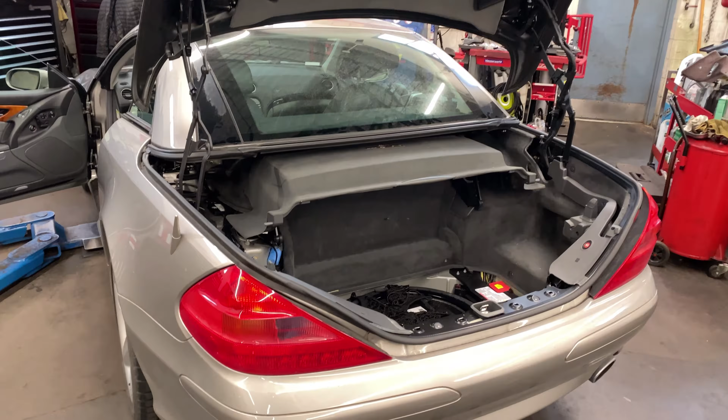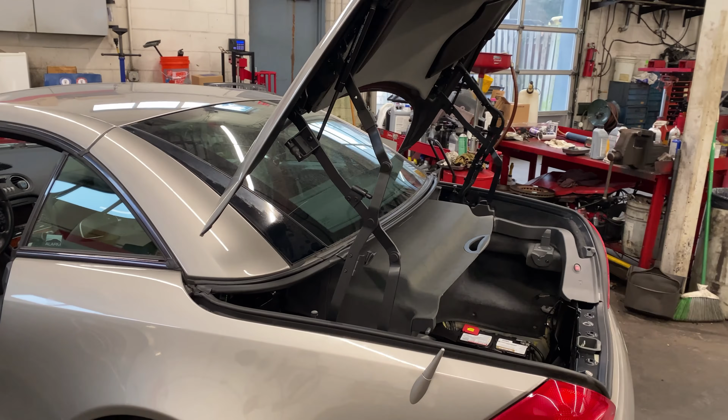Hey guys, welcome back. This might be part two on this Mercedes SL500 2005 with a convertible rooftop problem. As you can see, I had the convertible close, which I did manually at first because it was impossible for me to do it electrically or by commanding with a switch.

Things you need to do before you can even open the trunk on this vehicle: either have the convertible top fully closed or fully open. Otherwise, you will not be able to open the trunk.

I was completely right about hydraulic issues with this. Since I couldn't even open the trunk, we called the dealer to find out if they had the hydraulic pump, and they do have it. Even though now I know I don't need it, and I'm going to explain why not.

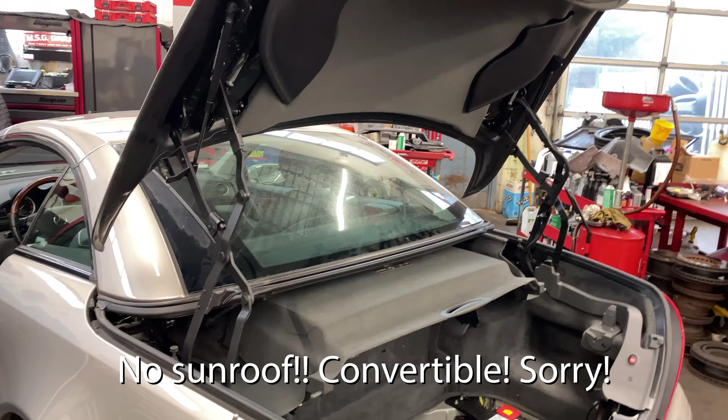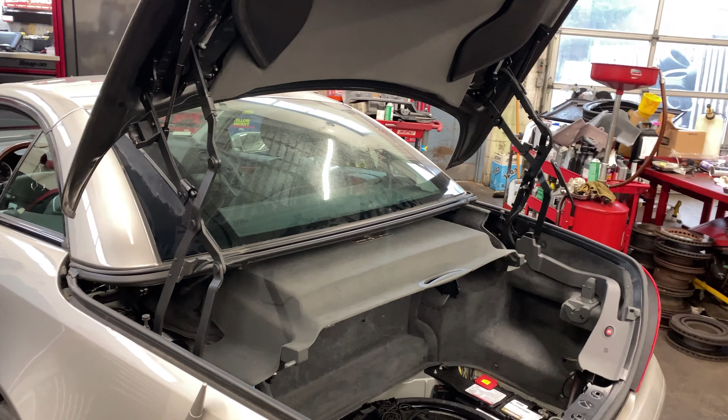But let me first show you the process of manually opening the convertible after you have it completely down, because otherwise the trunk lid will not open. You will know that because these flaps will not be even with the convertible.

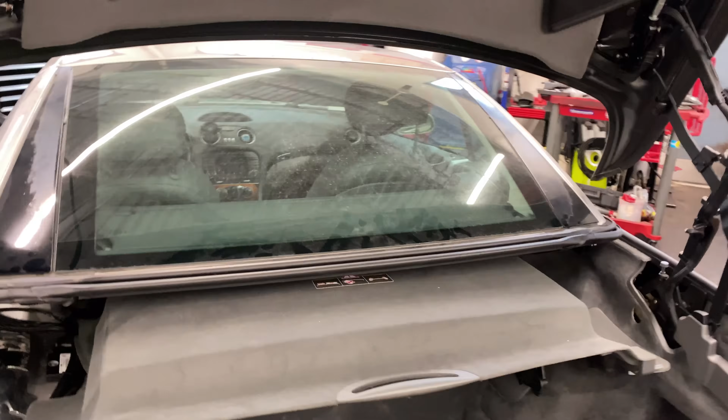So you need to make sure you can close that, even pushing it down, helping it, disconnecting, taking the ignition off and letting it sit for a little while, then pushing down until it locks. You will notice the windows raise up and stay there, telling you the rooftop is completely closed, and then you'll get a warning message on the cluster.

After that, make sure you have the key out of the ignition and at least 2 meters away from the car. Make sure you have the manual key with you, not the actual key fob, just the key, because you're going to need to unlock that.

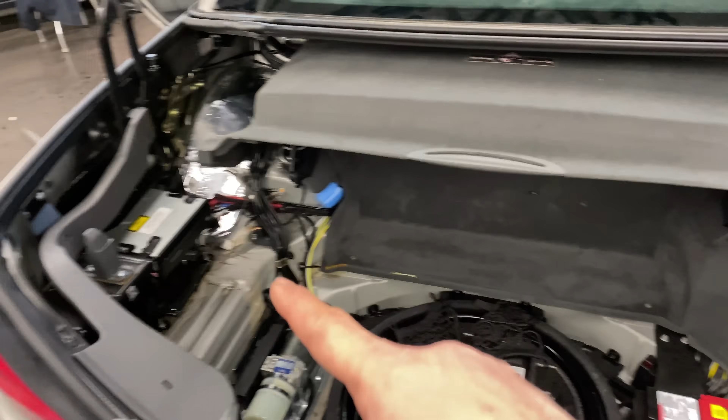With the covers on, now I have this side off. You have two plugs that you need to remove, one on this side and one on the other, to access this 6 millimeter Allen wrench bolt. You need to spin it. Let me show you - right now I got it locked, but it doesn't matter. All you need to do is put that in and go the other way.

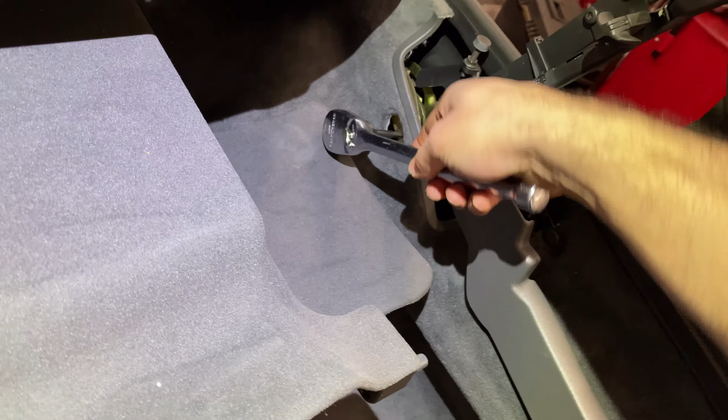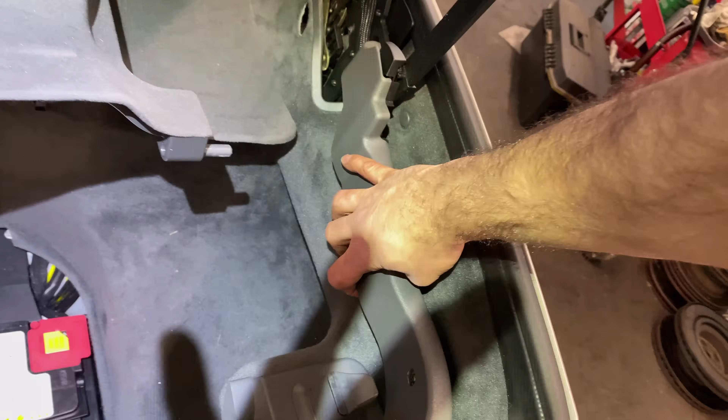See, it releases here, and then this one will too - sorry, I'm focusing on my vision and not the camera. Then this one goes the other way, and that will release the trunk. You need somebody to help you pull from here, both sides at the same time, to raise the trunk completely open.

Let's say you got, as it is right now, the convertible fully closed - that's the best scenario. But of course people aren't going to complain about a convertible roof closed. They'll complain when the convertible top is fully open and now they cannot shut it down, and it's raining or getting too cold, right?

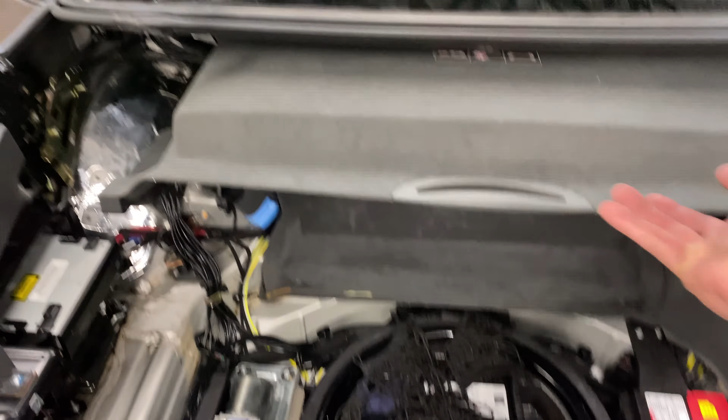So that's the problem. When you have that issue, before you do what I just said, you need to open the trunk, try to raise the whole convertible roof, and put a wedge or something in here so you can get to the motor - that's the hydraulic pump motor for the roof.

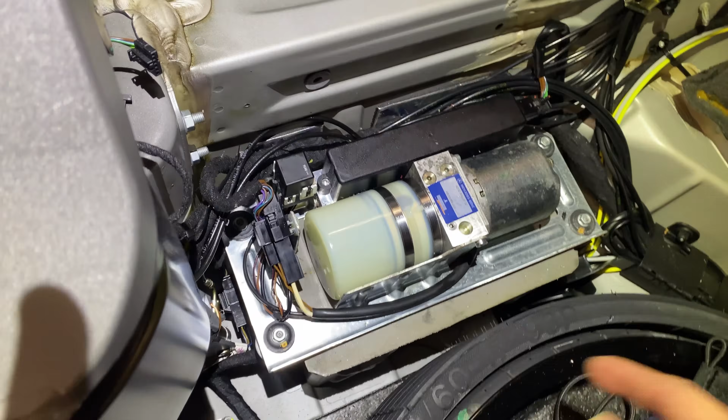Use the same 6 millimeter wrench here, go counterclockwise, then two turns - don't use too much force, just open it. That will release the pressure, and you'll see that now when you lower this convertible top, it will just sit down by itself because that releases the pressure of the entire system.

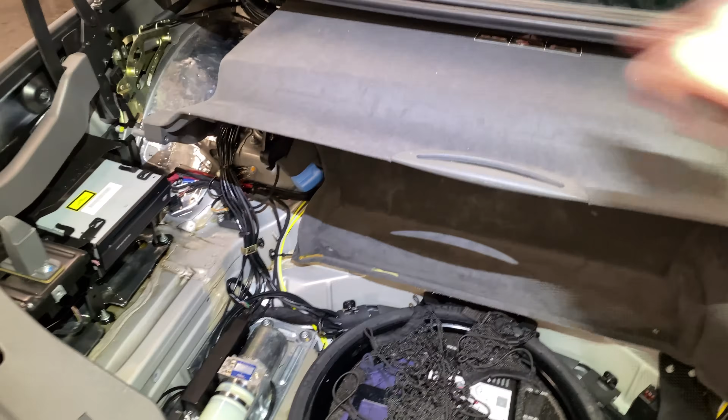Then you can go on the sides, do the things I said with the 6 millimeters, and then have somebody else pull the trunk lid open, fully open.

After you do that, and the convertible is fully open, you need somebody else helping you. Then you're going to grab the convertible top and try to guide the front to the lock mechanism - it's going to be like a pin that has to go in, and then a lock that has to fit in there.

Before you can close it or put them in place, there's also another thing you need to do here. That plug right there has to be opened up, same 6 millimeter wrench, and you go - I think it's clockwise, you'll see it when you do it - so the mechanism in here will disengage and let you bring it in.

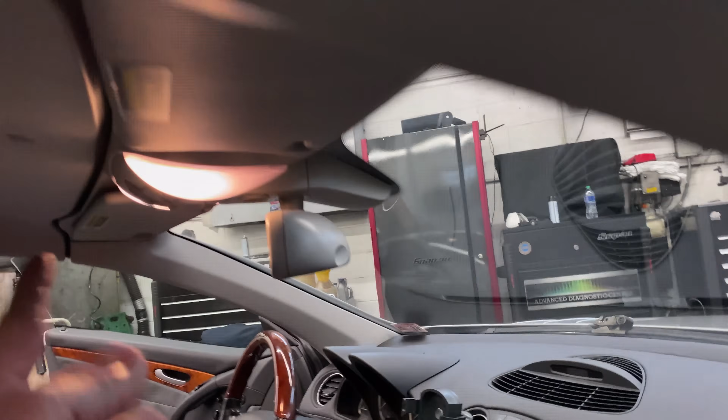When you do that, you can lock it doing the same thing on the other side. Make sure you push down here just to make sure there's no movement. Again, with two people doing that, then the roof is closed.

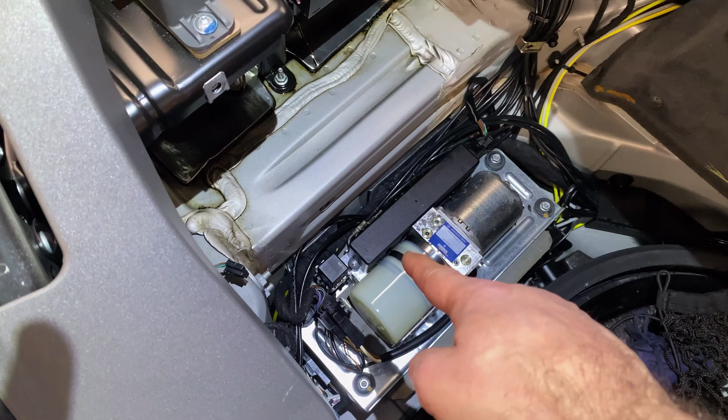You can then come in clockwise and close that valve. Again, just put a little strength into closing it, because otherwise the pump will not build up pressure. Then you need to come over to the trunk, and that's why you need to have the key on - I mean the actual key.

You need to secure it before you do that. You need to secure here, and again it's going to be the opposite way - you'll see the piston going in, so it has to stay in. You see how it's holding it down? Let me put some light so you can see it on this side.

So the piston has to stay all the way in for the trunk to be able to close. But since the convertible top was open, these flaps in here are going to be sticking out. And obviously this lid will be up here, right? You will have the lid up here and you will see that the flaps are all the way out.

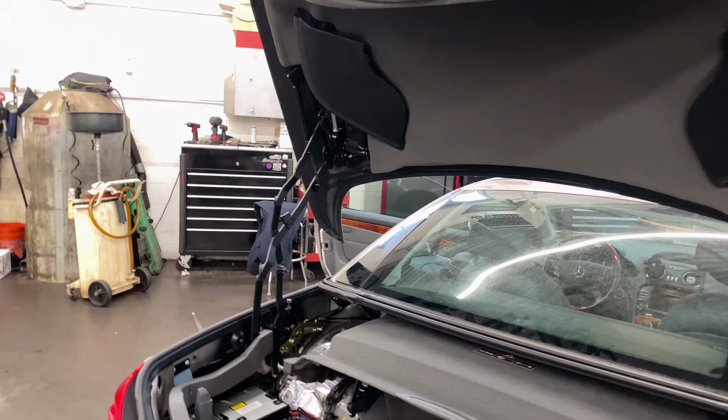So you need to connect the scanner. It has to be a factory-level scanner so you can go over to body, RBC or body or roof, and use the emergency activations to retract the side flaps. I used Xentry and I was able to do it with no problems. I didn't check Autel, so I would lie if I said whether it can do it or not. And for this particular roof, Autel, even the Ultra with the latest software, was completely useless. So that's my point.

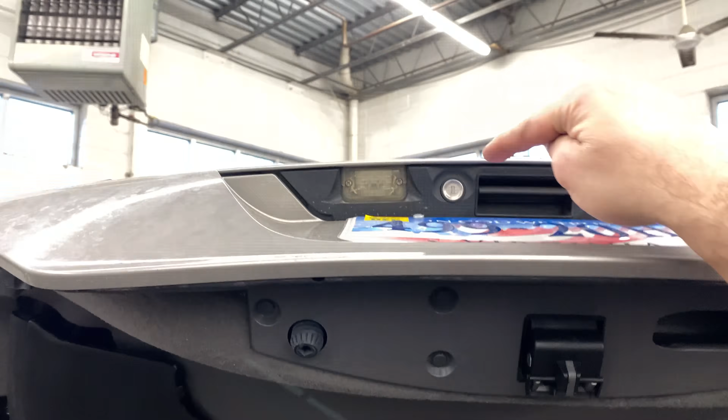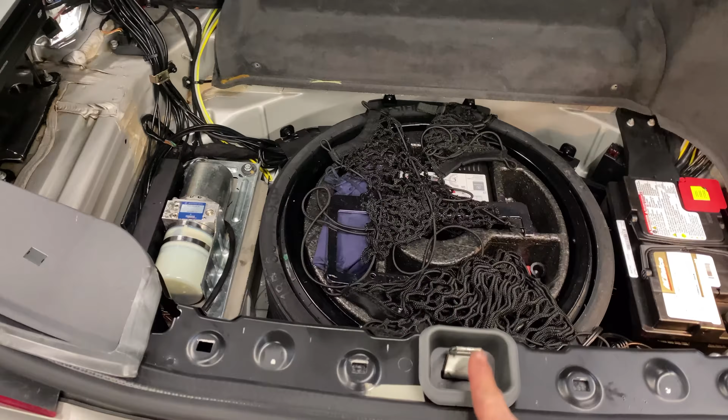When you close those flaps, then you're going to use the key to bring... Let me see if I'm saying this correctly. No, before, sorry, I'm talking too fast and not making sense. So it is the right procedure, but before you can close the flap, it will tell you the trunk is not closed, so you need to make sure you bring just the trunk lid. The whole bracket itself is going to stay there, but the trunk lid is going to come and shut. It has to be completely closed and sensing that it's closed for those flaps to be retracted.

After you retract the flaps, you can get off the scanner. That's all you need the scanner for. You can now use the key, close the trunk and put them into this position, which is the normal position. Make sure that this is closed before you close the trunk, and then just close the trunk.

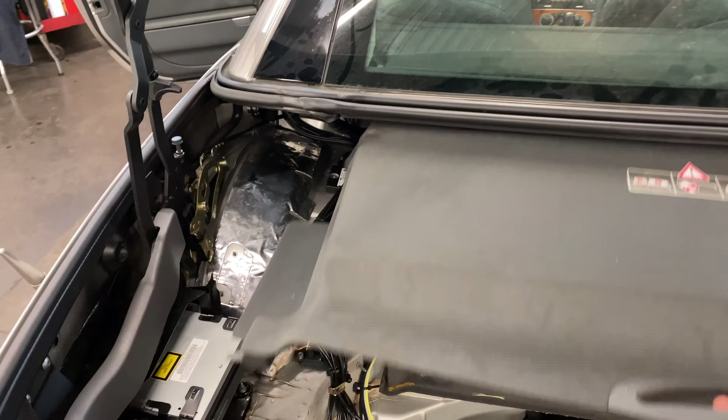And one thing that is going to tell you if you are right is those sides, right here and right here. If they're shutting down normally like in here, then the rooftop is fully seated in the front, and those levers on the side, the lock levers, they call them tubular left side and right side levers, will be completely inside. If you can still move them and they're not staying all the way in, you need to release the pressure and make sure that this rooftop is completely pushed in. That's just the way it is.

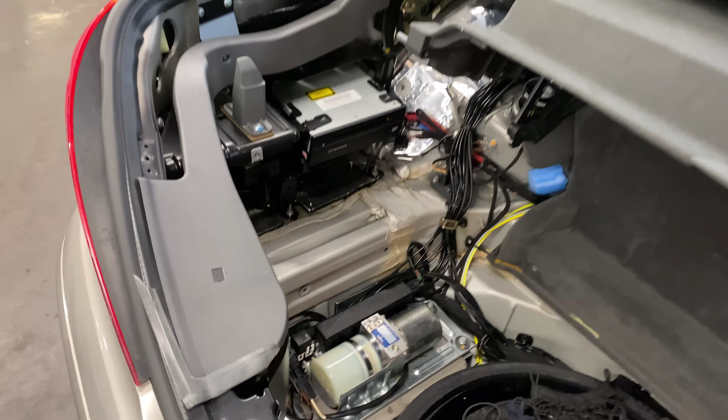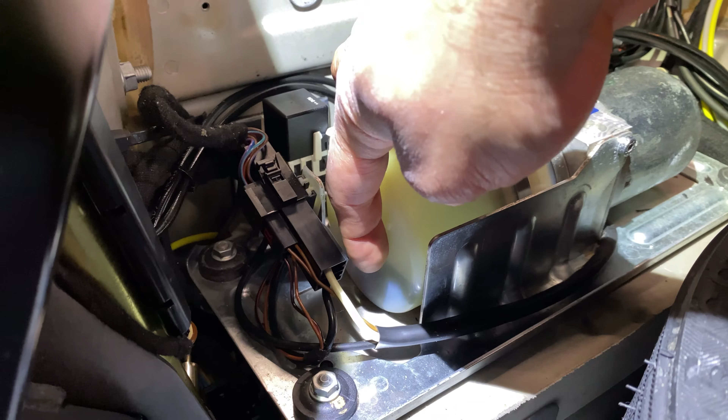That's how I went through all this process, and then I was able to see that the pump right now has oil, but this was almost empty. Right here, there are two triangles. You can see it in there. There is one here, that's the upper level, and the other one is the minimum. It has to be in the middle of that. So I'm like, okay, we're missing oil. Something is happening. And yes, I was low on oil.

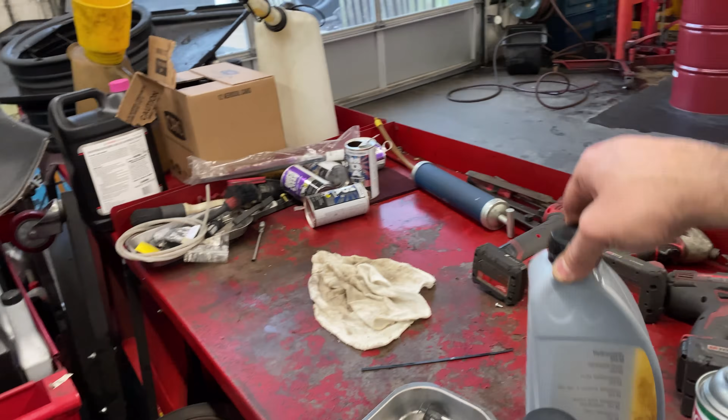Make sure that you use original Mercedes-Benz oil, only Mercedes-Benz, and this is what the dealer sent with the specific VIN number from this car. You use the side plug right here on top. Let me see what size that is, so you guys get the whole picture. I still have it here, and that's a 4 millimeter.

So that's a 4 millimeter on that plug. I put an absorbent rag on the sides, and just by squeezing the container with my fingers, I was able to squirt and fill it up with, as you can see, not a mess, not a drop outside. Everything is 100% clean in here. So if you can do that, do it that way. Otherwise, find yourself a small bottle and fill it up slowly. That's the only thing I can say.

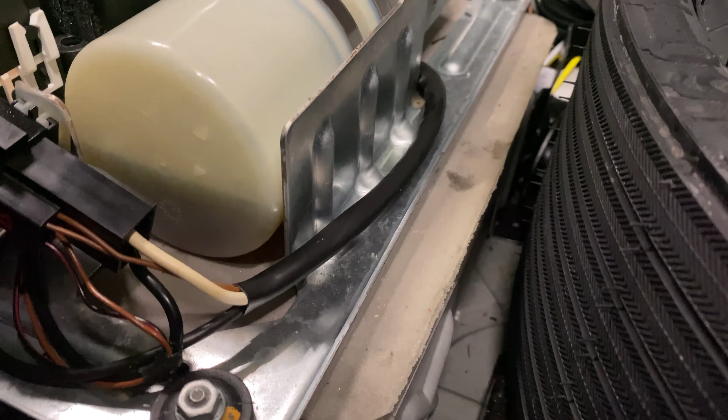So after that, the pump operates, and I was able to move the roof back and forth with no issues and fast. But then I saw that it was slowly slowing down. I'm like, okay, this is not right. I came back here, and now, as you can see, it's a little lower than the level. So I'm like, maybe it's air. So I filled it up again about 4 times, and it's doing the same thing.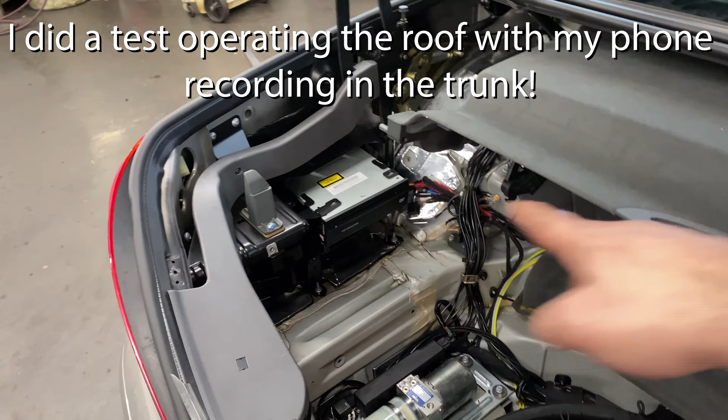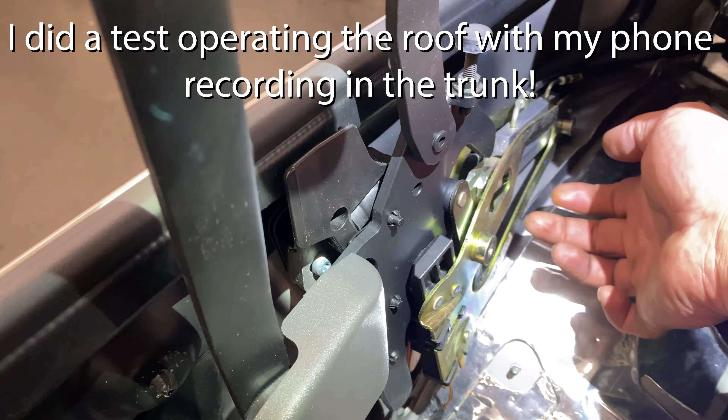So I opened this cover on this side, and I noticed oil sitting in here. I cleaned as much as I could, but you still can see oil here, and the oil is coming from the side lock tubular tubes. Not sure if you're going to be able to see that, but I'm trying to.

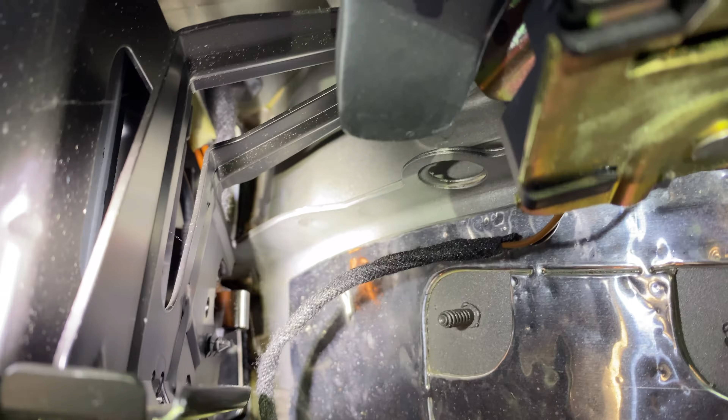Show you that it's all full of oil. Let me get the light to exactly what I needed. Hopefully you can see the liquid reflection right at the bottom. Camera is not really focusing on what I need, but believe me, it's right at the bottom.

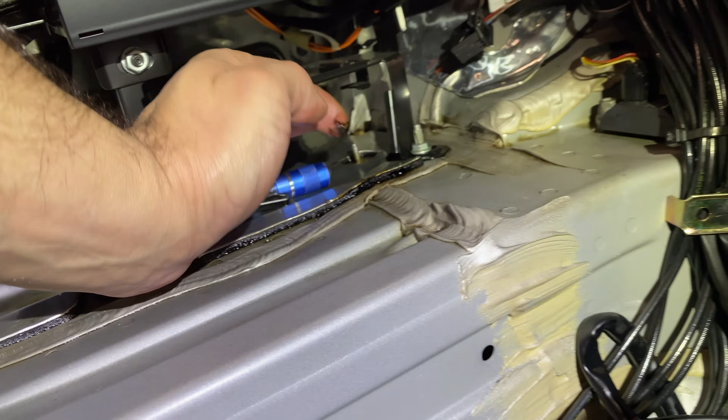So what it's doing, since there is a lip in here on this, the oil drips on that side, goes down, and then it stays in there till it fills. I gotta be able to show that here. I mean, look at all the oil right there. See, it's still dripping. Look. And that's the same on both sides.

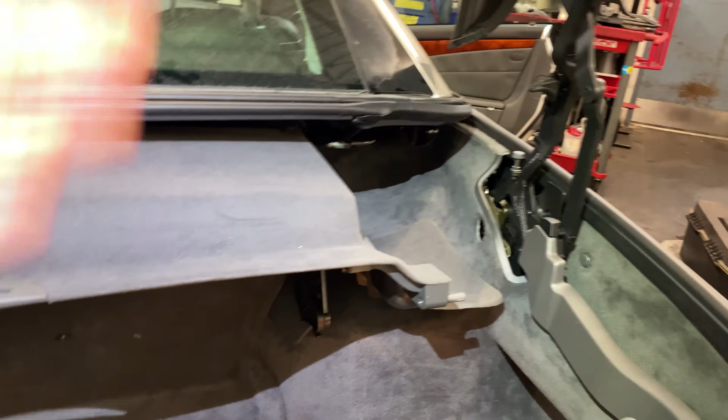So I'm going to open the rooftop, or not the rooftop, the trunk lid, and take the plastic covers and get everything ready. Parts are coming tomorrow. They're in stock, but not in Virginia. So we go from there. Hopefully this can help somebody, or even myself in the future.

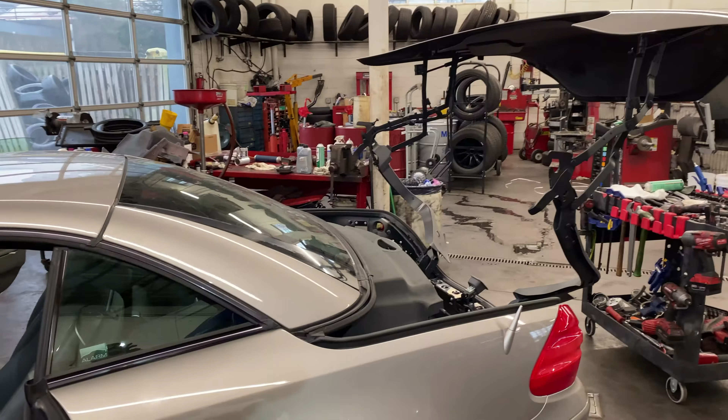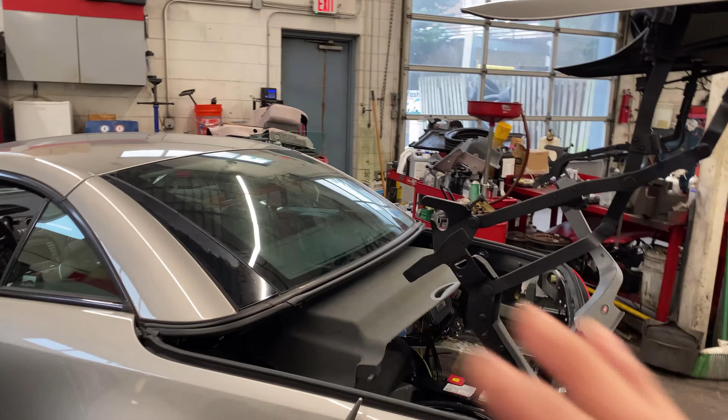All right, guys. Just to give you a little bit of how that trunk open looks. One thing that I forgot to mention: before you bring the rooftop completely open to close, make sure those are open and windows are down just in case the car locks itself or something. That's just a precaution.

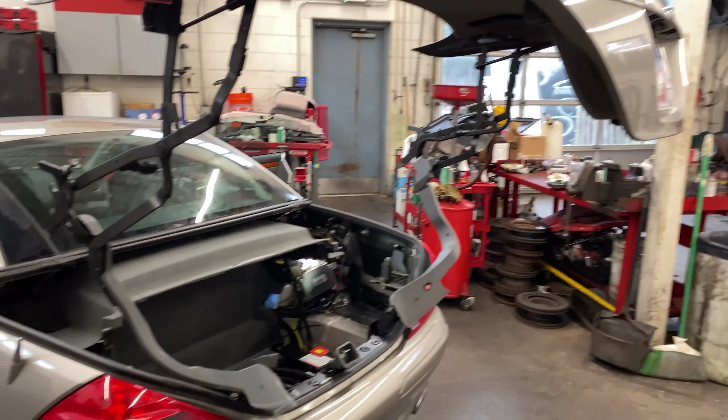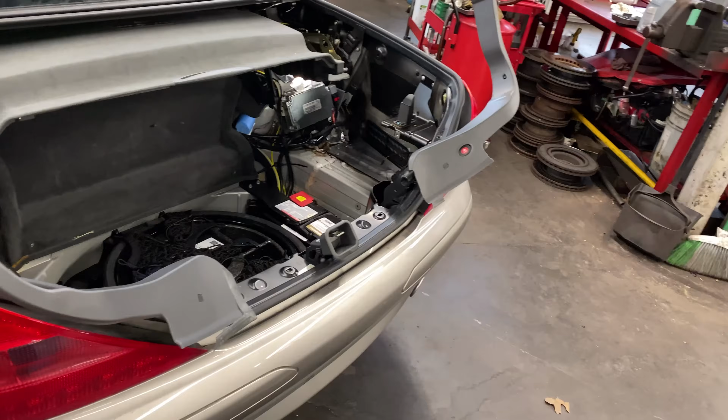And this is the position: before you close these flaps, that now are closed because the rooftop is closed, these flaps here will be up in here, right? Closing that section. And then you need to shut the lid onto the receiver right there in order to close those flaps.

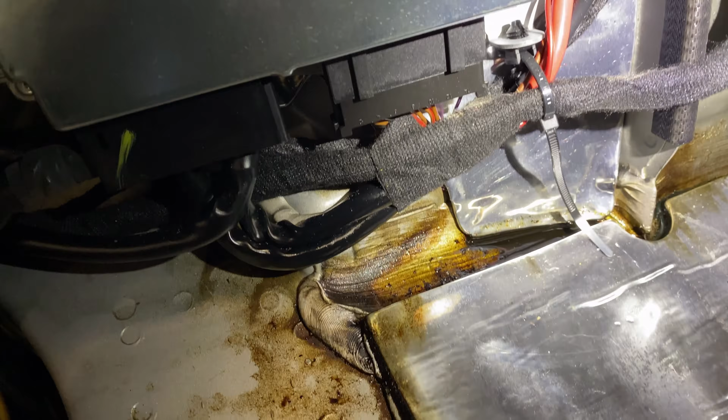All right, so I got the outer cover out and I haven't touched anything in here except for the plastic cover. And look at all that oil, right? You can see it's definitely the leak. It's not a tremendous leak, but this system doesn't use that much oil either.

So I'm going to have to remove a lot of plastics. It's just to guide and hold those hoses in place, and get those locks, but they will be here tomorrow. So I want to show you the information where it says about the name.

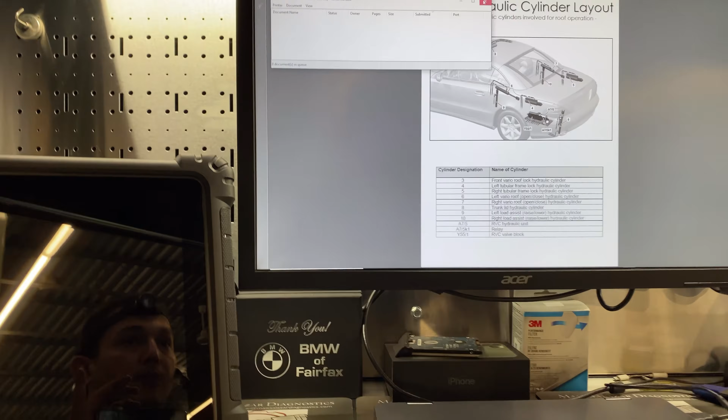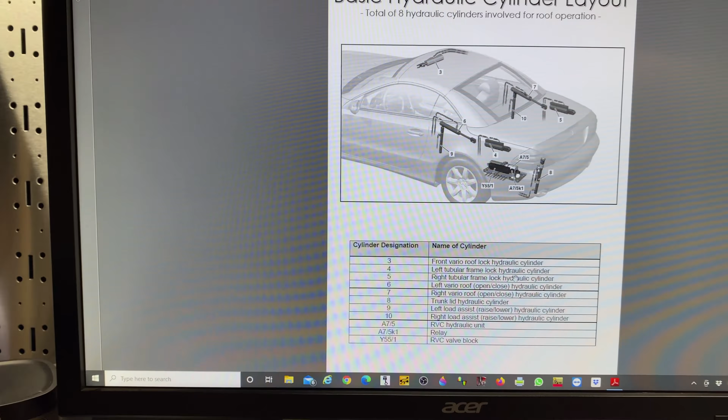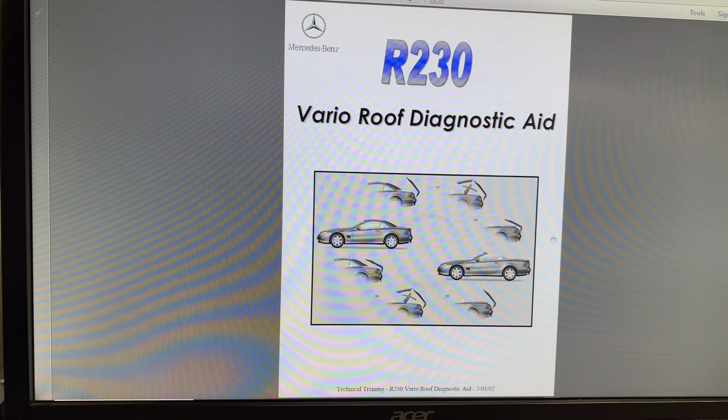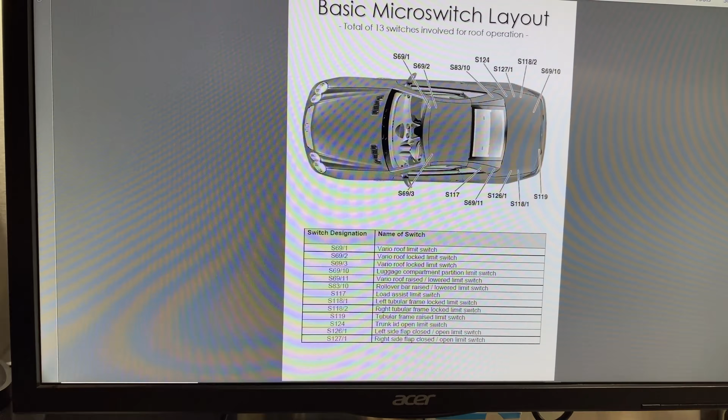So this will help you get familiar, give you a simplified view. You can do your own notes in case you want to save it for later. Again, that's the same. Actually, this is not the same, so let me show you this one too. Keep it on the screen for a little bit.

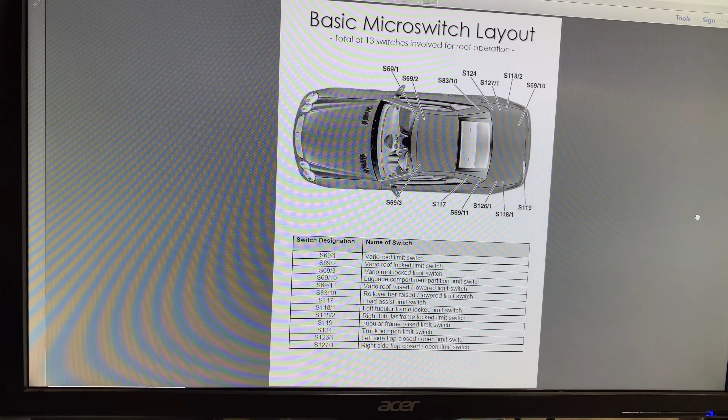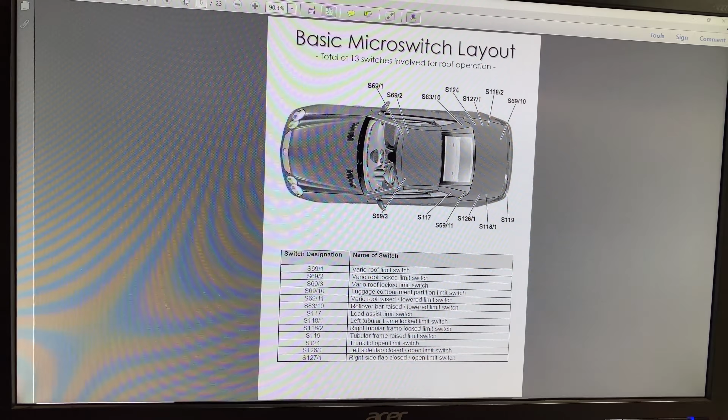This is the position of all the switches involved in this system, which is very important to know where they are, because it is very confusing when you have so many switches, like S117, S69, forward slash or whatever, 11 and so on, right? All right, so this is a simplified wire diagram.

And yes, I was using Xentry and then DAS, which is the old version for these 2005s. Right now, the newest one, I think, is 11 and up. It just uses Xentry, and then the newest ones use the new communication.

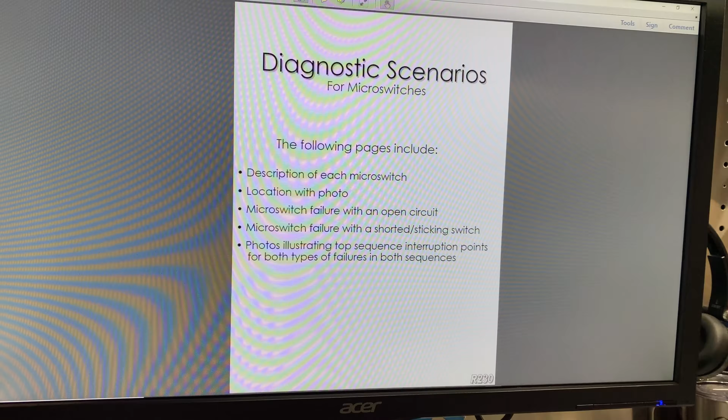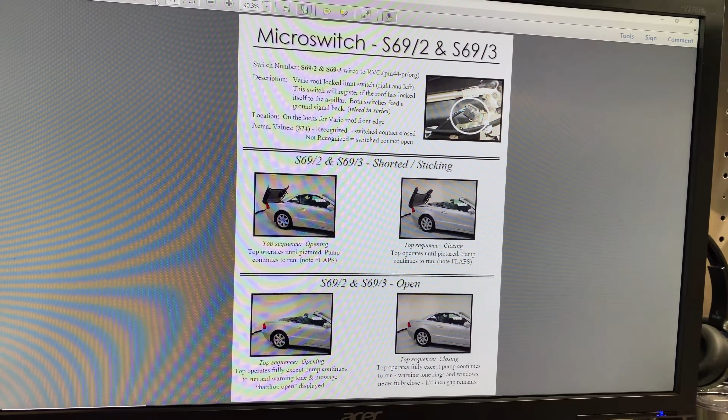Again, that's now even better, where the switches are with color pictures. You can zoom in and look at all that stuff. Even here, this is what I'm saying about zooming in. This is a very good PDF. Just going to go a little fast on that. Well, actually, I shouldn't.

Sorry, I got a call from somebody using my phone.

So again, we'll just go slow so you guys can stop the video and watch that. This is one of the main switches you want to check, the S117. That's the limit switch.

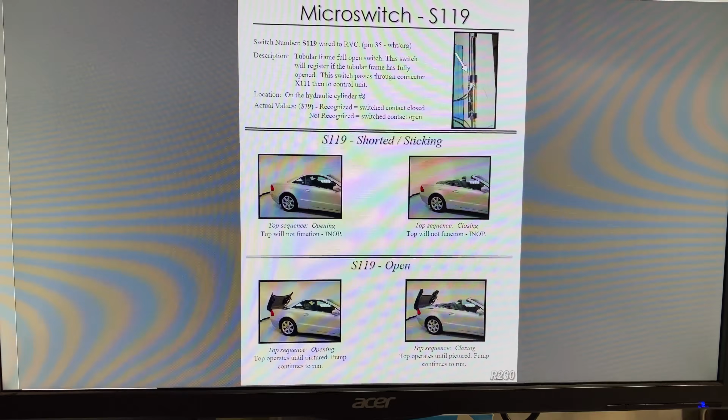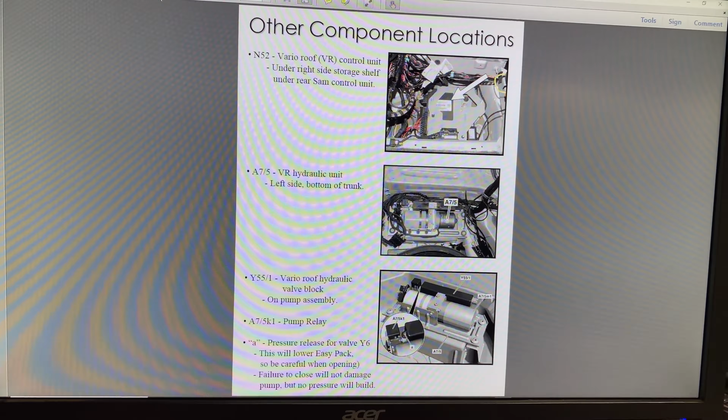This is just to share information with you: where the pump is, the control unit, where it's located, and that is inside the car, obviously. The A, as you see, is a pressure relief valve. And one thing that is missing in this very good information is where to put the oil, how to put the oil, or what the level is. So I show you this in here too.

All right, guys, I will be recording the repair part separately, and hopefully that's the end of the missing oil on this car, and I can give the customer his car back, and he'll be happy.